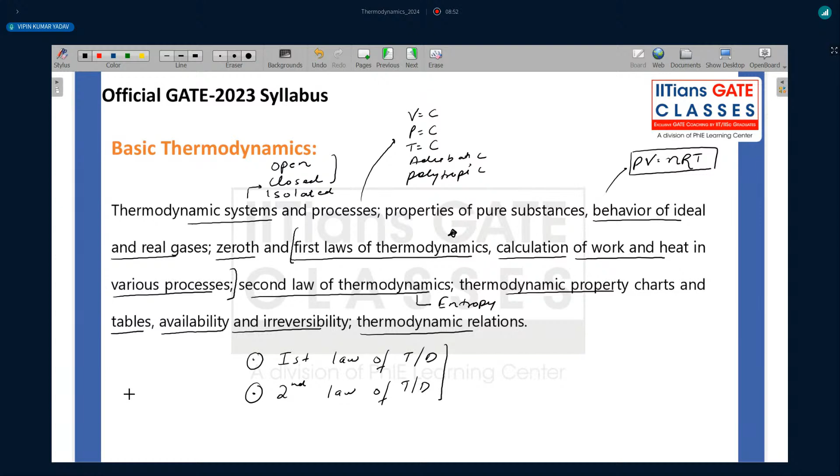let us take a look at some numbers, so that you can make a decisive decision on what topic to cover. First of all, what is the motivation of covering thermodynamics? Why should you cover thermodynamics? What we are doing today is basic thermodynamics. We are going to start with basic thermodynamics, and then a whole topic comes as applied thermodynamics. Now you cannot study applied before basic. So basic must be covered first, and without basic you can never prepare for applied.

So if I talk about the combined weightage, it goes to more than 10 marks in GATE every year. So 10% of your total weightage out of 100 comes from basic and applied thermodynamics combined. Applied I have not covered here. When we start our subject in regular classes, I am going to cover it, because in applied we have power plant, IC engine, and RAC. All together, again, it comes to around 5 marks. So basic and applied combined comes to around 10 marks.

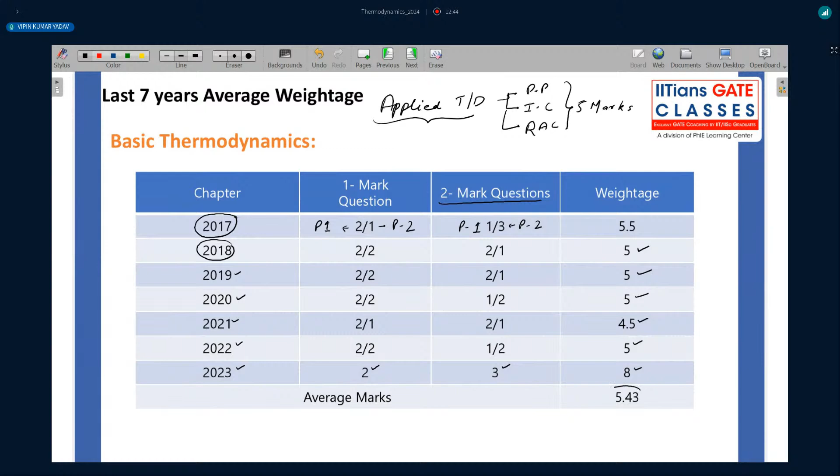But if you see 2023, GATE just happened 3-4 days back, so I have collected this data. I'm not sure how correct it is, but it's 99% correct. In GATE 2023, we had a single paper, with 2 1-mark questions and 3 2-mark questions, so the total weight is 8 marks. The weightage of basic thermodynamics, just basic, not even applied, is 8 marks out of 100 in GATE 2023. So 8% of the total weightage was taken by basic thermodynamics. Now if we take the average weightage, it's around 5.5 marks taken by basic thermodynamics.

So this must be your motivation, because 5% of GATE is basically a huge number. Okay, now the second motivation is you cannot even think of studying applied thermodynamics without studying or before studying basic thermodynamics. So you have to study basic thermodynamics to go to applied thermodynamics, and then the combined weightage is around

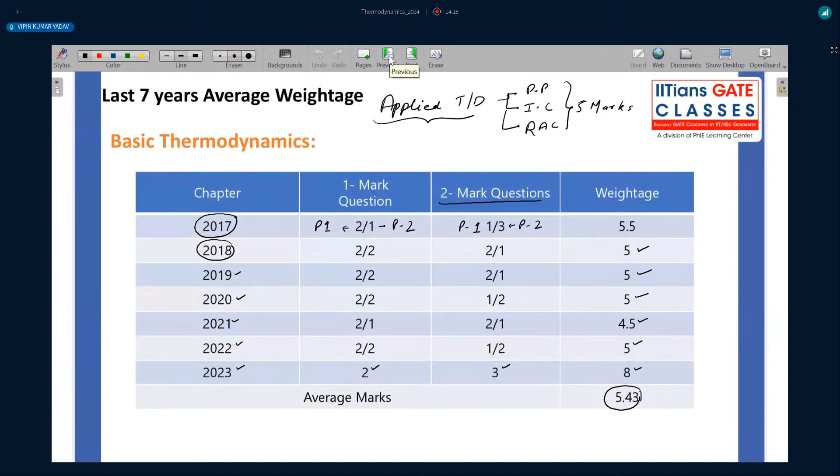How many questions were there? The questions came from what topic? This I have to check again one more time. Chalo. Now if we see the basics, which we call basics of thermodynamics or introduction to thermodynamics, 3 questions came. In 6 years, only 3 questions came from the first chapter, which is basics, thermodynamic systems and process. Zeroth law also comes in this. So for the introduction or very first chapter, only 3 questions came in the last 6 years.

Now if you talk about the first law of thermodynamics, a total of 13 questions came. And same for the second law of thermodynamics, again 13 questions came. So you see how much weightage these 2 topics have in the whole thermodynamics syllabus. Then availability and irreversibility, total 2 questions came. Properties of pure substances, 7 questions came. Properties of pure substances are applied here and there, so you cannot just say it came from this chapter, because even some questions from first and second law are indirectly related to pure substances.

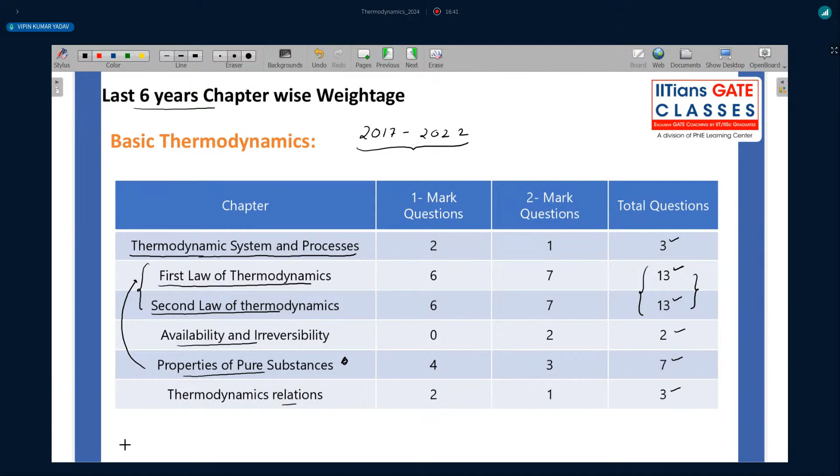So I think I have given you enough motivation to start thermodynamics. And not just start, because if you are preparing for GATE 2024, of course you have to study, but why you should study, I have given you the motivation. I have also told you what topics are important. Now let us move on to the main topic for today, which is the relationship between, or the difference between, the first and second law of thermodynamics.

So there are a few people live here. Can anyone tell me what is the first law of thermodynamics? Very quickly, I'm not going to wait for a long period. Just tell me if you have any idea what the first law of thermodynamics is. Whatever you understand when we say first law of thermodynamics, just write in the chat box and we will discuss what you are saying.

Because if we have to understand the relationship between first and second law, of course we need to understand what the first law is. I hope that you are in third or fourth year of college, or you may have passed out of college now. So I'm guessing you would have some idea of the first law of thermodynamics. Anyone? Okay.

So when we talk about first law of thermodynamics, it is a law of nature. Yes, very nice. It's energy conservation, and it is very important, Kanish, that you are saying energy conservation, because this is what first law is all about.

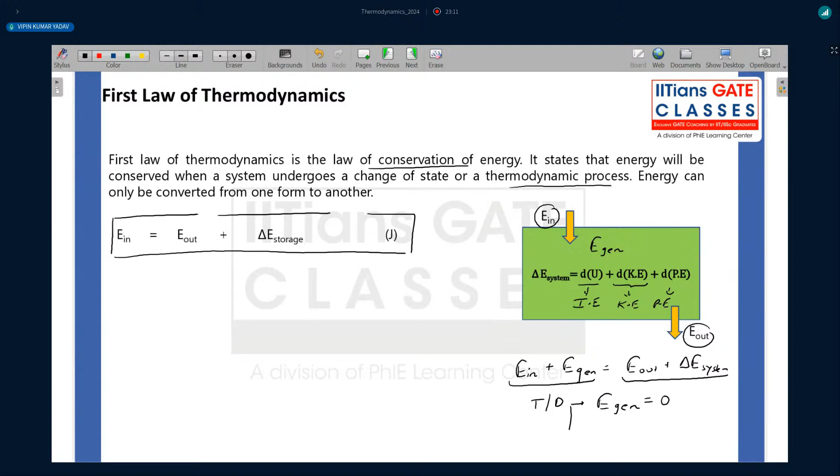Just 1 second. Okay. So I hope what I'm writing is visible to everyone. Can you confirm if it is visible?

Okay. So it's very important that you understand that it is specifically defined for a process. And whenever a thermodynamic process is happening, you can apply this equation. Many times during our regular classes, when we cover first law, we are going to use this equation. In fact, in each and every question, we are going to use this equation.

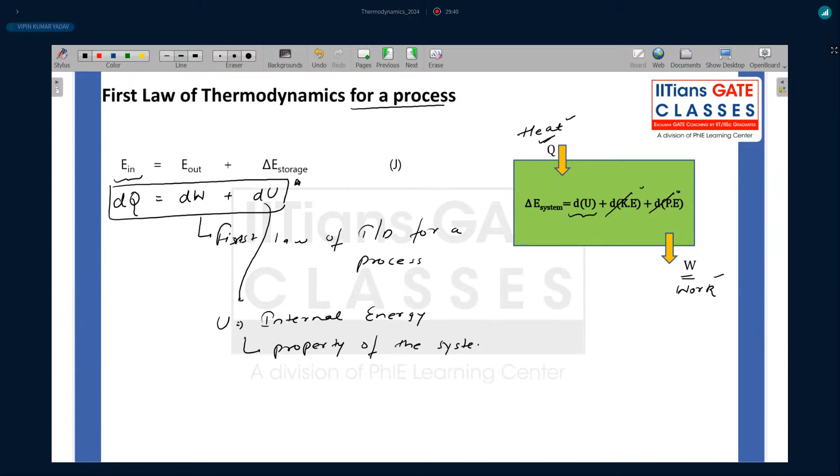Now here the term that we are using, internal energy, U is internal energy, and it is a property of the system. So as we know, for a cycle, change in property will be equal to 0. And I have just told you that internal energy is a property. Now change in internal energy for a cycle will be equal to what? Will be equal to 0.

So if I again use my same equation, energy conservation, dQ is equal to dU plus dW, and I apply this for a cycle, I can write dU is equal to 0. Okay. So what do we have now? dQ is equal to dW. So again, very important to understand that this is the first law of thermodynamics for a cycle.

Okay. So I hope that you are able to distinguish. First of all, what is first law? It is an energy conservation law. Second, what is the first law for a process? And then what is the first law for a cycle? Okay. So I hope you are able to understand this till now.

So I hope that you can answer this. I have a few people in the chat. Can you tell me what is the right answer? First law of thermodynamics deals with: A, B, C, D. Conversion of heat into work, conversion of heat, conservation of energy, conservation of entropy. Can anyone very quickly tell me what is the right answer? Quickly. That is correct. Conservation of energy. That is absolutely correct.

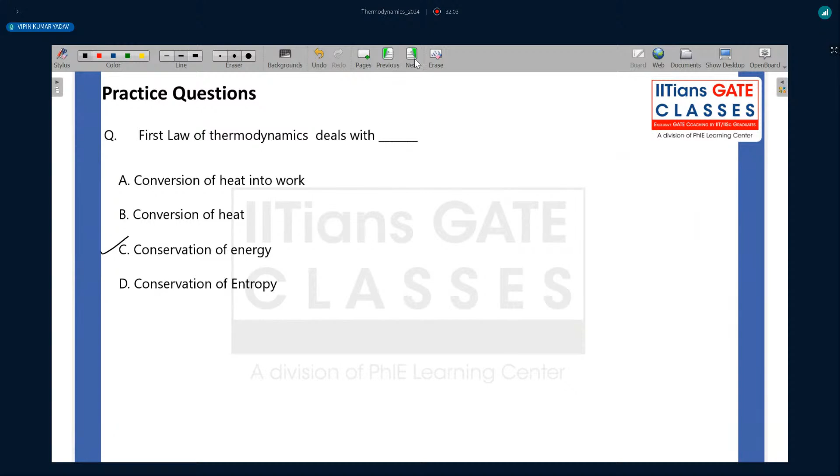Okay. Now, I hope that you people have a little bit of idea about PMM1. If you answer this, I will move on, and of course we are going to cover this in a regular class. If you don't answer this, then I will explain what is PMM1. But can anyone tell me, what is PMM? Perpetual motion machine.

So PMM1 violates which law of thermodynamics? First law, second law, third law, or it doesn't violate any of the laws and it is possible? PMM1, perpetual motion machine 1, violates which law of thermodynamics? Is it the first law? Is it the second law? Is it the third law of thermodynamics, or none of the above?

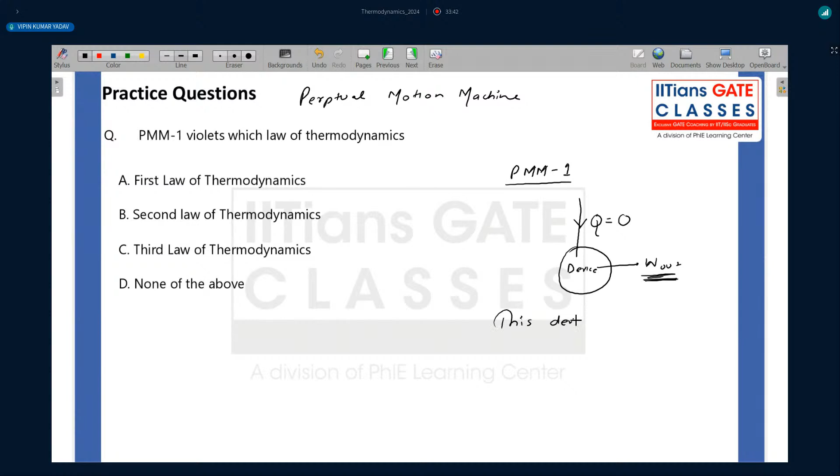So just very quickly, let me tell you. PMM1 is basically a thermodynamic device that works on a cycle and gives you continuous work output. So we have a device which is giving you continuous work output without exchanging any energy. We are not giving any energy, but it is giving you work output. So basically this device is creating or producing its own energy.

So is it possible? Is any device that is creating its own energy possible? Anyone? Here I am not giving any energy, but it is giving some work output, some form of energy. Is it possible? Anyone? Very quickly tell me, is it possible that a device is creating its own energy without exchanging any energy from outside the system?

No, that is not possible. That is not possible. Okay. There is no device that can do that. And if there is a device that can do it, then it is violating the law of nature. It is violating the first law of thermodynamics. So basically, PMM1, yes, first law, very nice, Aman.

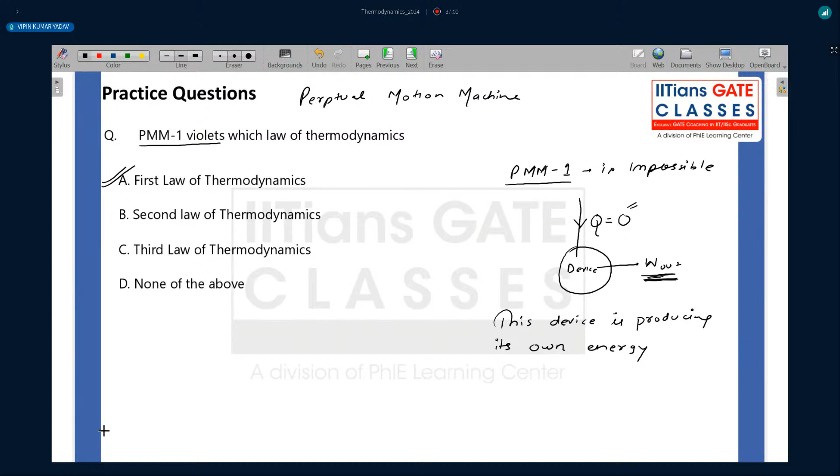Okay, chalo. So I hope that you, of course, it is not an exhaustive explanation of first law, because first law in itself is going to take around 4 to 5 hours, maybe more than that. But I have given you a little bit of idea what first law means. Okay. Now the point is, what is the limitation of first law? What is the limitation of first law? So there are three limitations. First is direction of the process. Second is feasibility of the process. And the third is quality of the process. Very quickly, we are going to understand what each and every word means here.

Okay, very quickly. So let us talk about first direction of the process. What do you mean by direction of a process? You tell me one thing. Look, we have a hot body here which is at temperature, let us say T1, and we have a cold body here which is at temperature T2, and if I am saying hot body, it means T1 is greater than T2. Now, if these two bodies are coming in contact with each other, how will the heat transfer take place? How will the heat transfer take place?

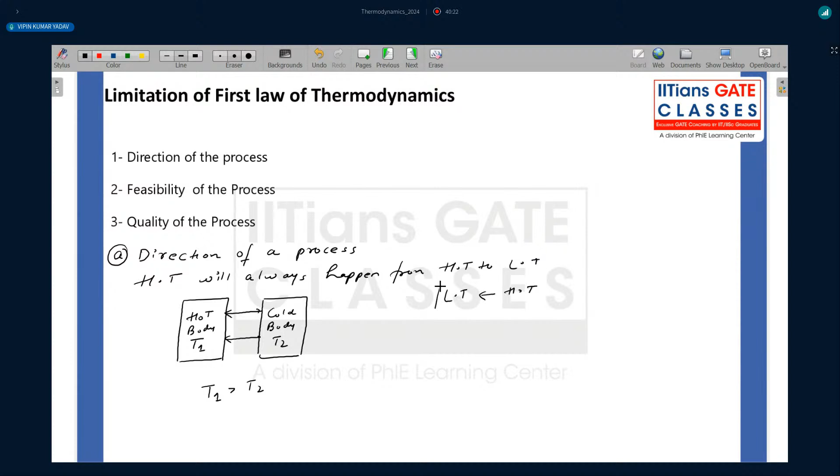Now, high temperature to low temperature is happening naturally. But you see, low temperature to high temperature will never happen naturally. Never happen naturally. Now, first law doesn't tell me about this. First law says if there is a temperature difference, heat transfer will happen. Now whether it will happen from high to low temperature or low to high temperature, first law is not telling me. First law is only telling me if you have two bodies and they have a temperature difference, then there will be a heat transfer, and during that heat transfer, energy will remain conserved. That is the only thing that it is telling me. Now, it is the second law that is telling me that heat transfer will always happen from high to low temperature.

Okay, so again, to summarize, when I talk about direction of the process, first law gives me no idea about the direction of the process. It only tells you that if the process is going to happen, the energy will remain conserved. If it is going to happen in that direction or not, it will not tell me. It is the second law that is going to tell me if it is going to happen in that direction or not. Okay, so first thing is direction. Is it clear?

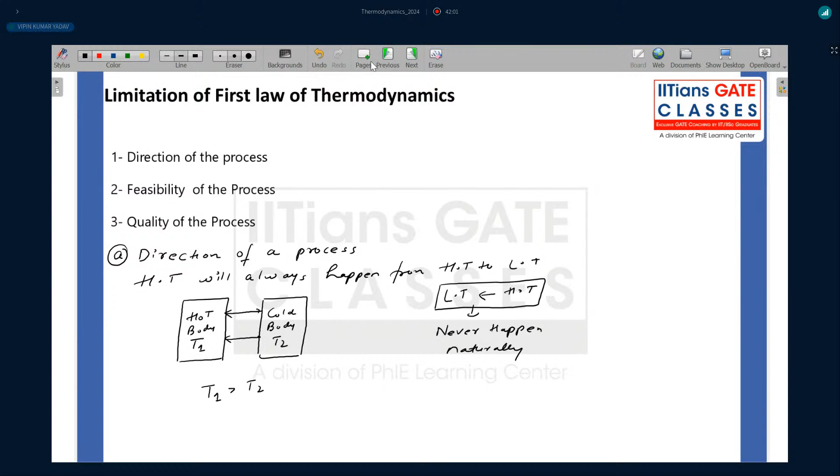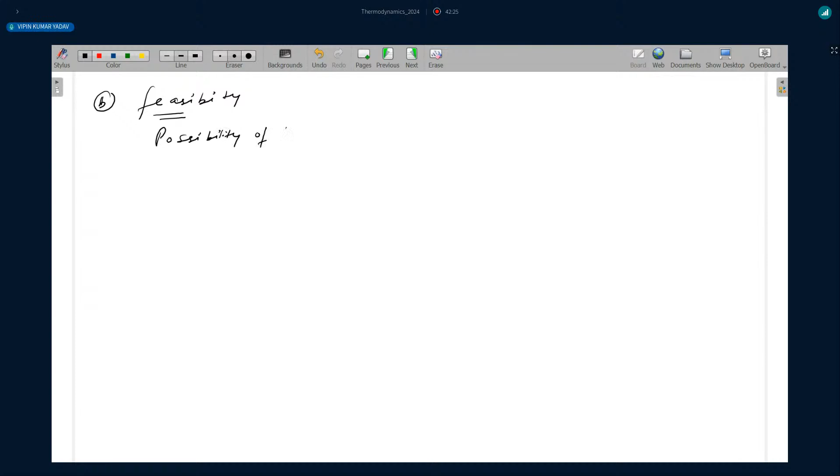Then the second is feasibility. What do you mean by feasibility? Let me add a page here. So when I talk about feasibility, B part is feasibility. Feasibility means possibility of the process, whether the process is ever going to happen or not. If the process is even possible or not, this is the feasibility.

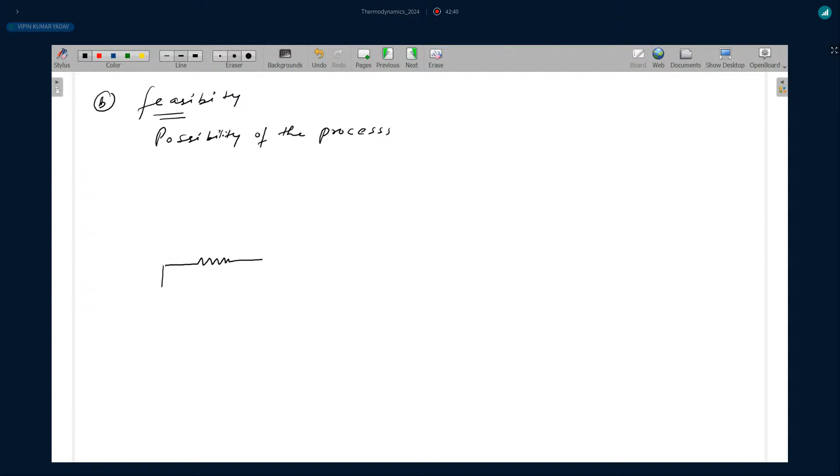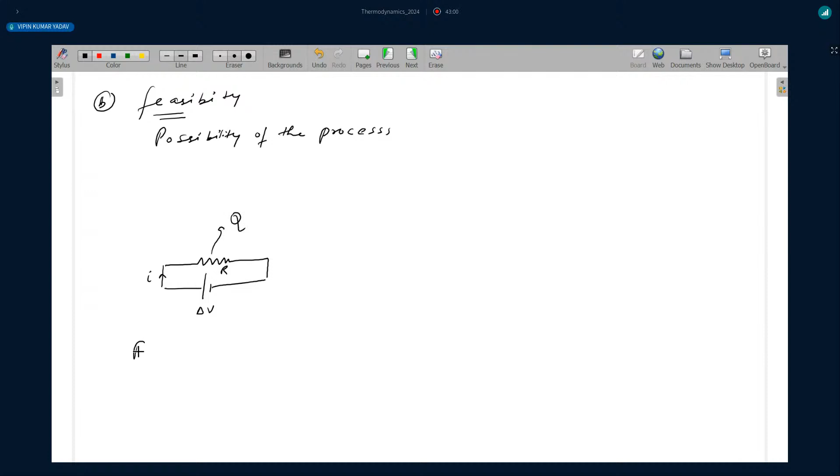Now let us say you have an electrical circuit. There is a voltage difference and some current is going through it. It is a resistor, resistance. Now when the current passes through this resistor, heat will be generated. So what is happening here? Electrical energy is converted to heat energy, right? And when this is happening, first law tells me that energy will be conserved.

Now, according to first law, it is also possible. What we can do is, if again I have a system here, tell me one thing. 1 second. So I have made an electrical circuit again. Now tell me, if I give heat to this resistor, is it possible that it is going to create a current and finally a voltage difference will be created? Is it possible or not?

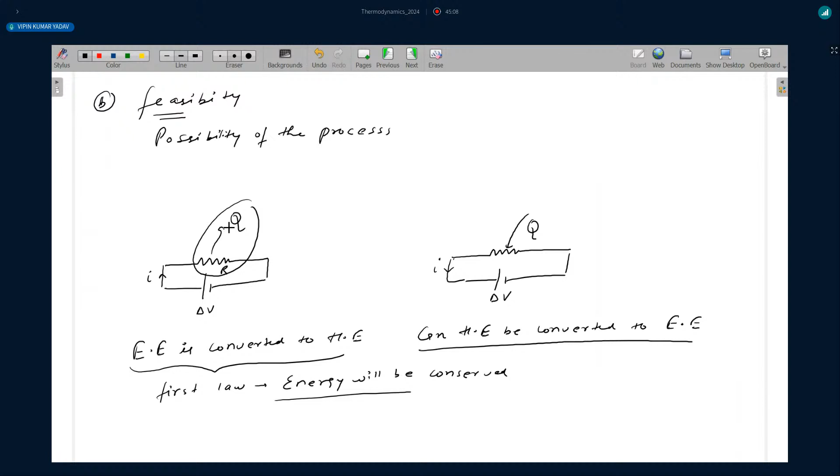Here, electrical energy is converted to heat energy. Here, heat energy I want to convert. I'm not saying it is converted. Let me write it as a question: can heat energy be converted to electrical energy? No, we cannot do that. You see, first law is only telling me when this process is happening, energy is conserved. First law is giving no restriction. It is telling me if you transfer heat and somehow create some current and a voltage difference, still energy will be conserved.

But it is not telling me if this process is even possible or not. There is no indication by the first law about the possibility of the process. First law is telling me, if you are able to do it, the energy will be conserved. That's all. If you are able to do it or not, first law gives me no idea. So it is not giving me any feasibility of the process.

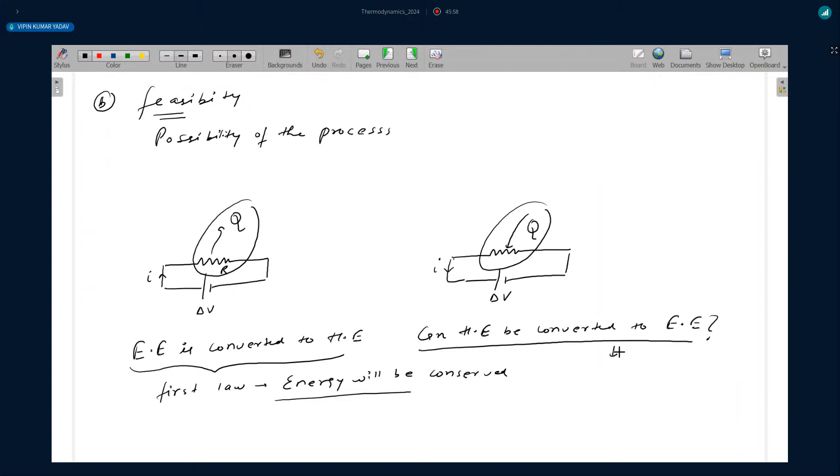Now there is one more reason that heat energy cannot be converted into electrical energy, because of the quality of energy. Heat is a low grade energy, electrical energy is a high grade energy. So the last difference that comes here is quality of the process or energy.

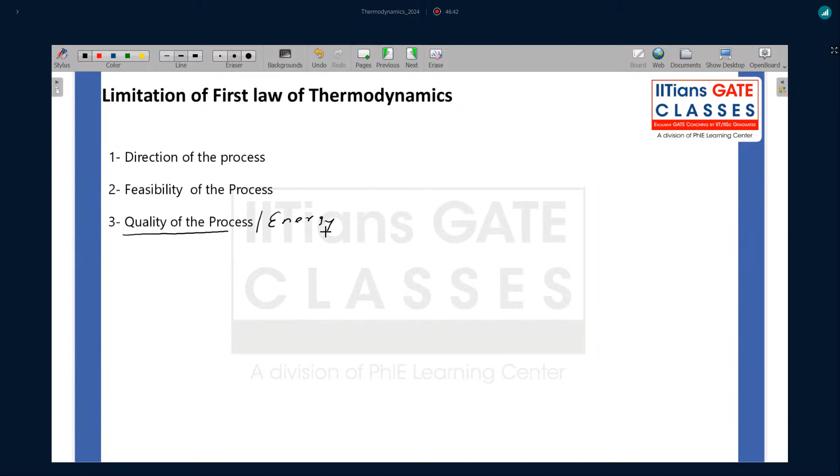Okay, are you able to understand what we are discussing? Any doubt till now, anyone? Then we will move on further. Quickly tell me if any doubt till now, yes or no. Anyone, any doubt? So should we move on?

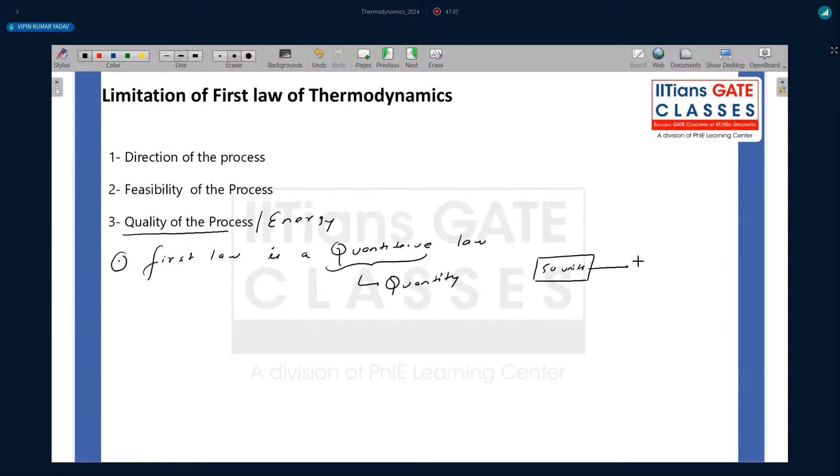Chalo. So the last is quality of energy. Now what do you mean by quality of energy? Look, when we talk about first law, first law is a, I'm sorry, quantitative law. What do you mean by quantitative law? It talks about the quantity of energy. For example, 50 units of some energy is converted into some 20 units and 30 units are gone somewhere else.

Okay, very nice. Just 1 second. Okay, so am I audible? I think just 1 second. You are currently the only person in this conference. To stream. Three dots means, I think, you are not able to join.